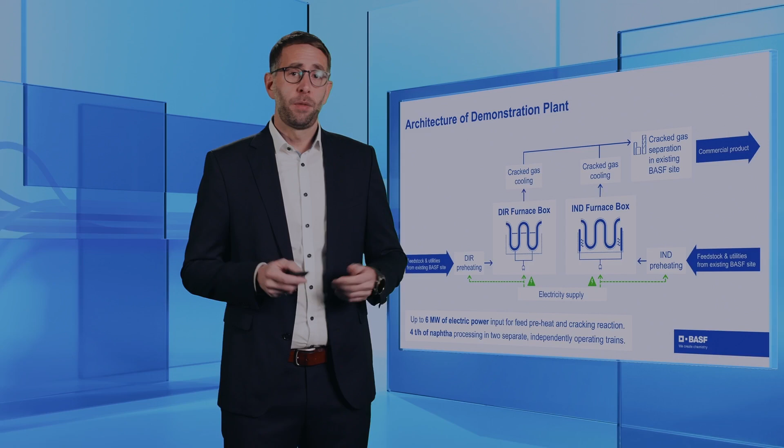Torben already gave you some information on the plant, on the layout, and on the two different heating concepts, and I will now go on with the architecture of our demonstration plant. The heart of the demonstration plant are the two furnace boxes for the direct and the indirect heating technology. Both concepts are equipped with electrical preheating for the steam and for pre- and mixed feed superheating. Both technologies are equipped with crack gas cooling as well.

As Torben already said, the demonstration plant is fully integrated into one of our steam crackers at the Ludwigshafen site in Germany, which means that all the feedstocks and utilities are supplied by this existing cracker, and the crack gas produced within the e-furnace technology is led to the crack gas separation in an existing cracker, producing high-value chemicals, commercial products with a reduced carbon footprint. Even if we do not have a fully heat integrated state here, we see carbon savings on scope 1 in the range of 90%.

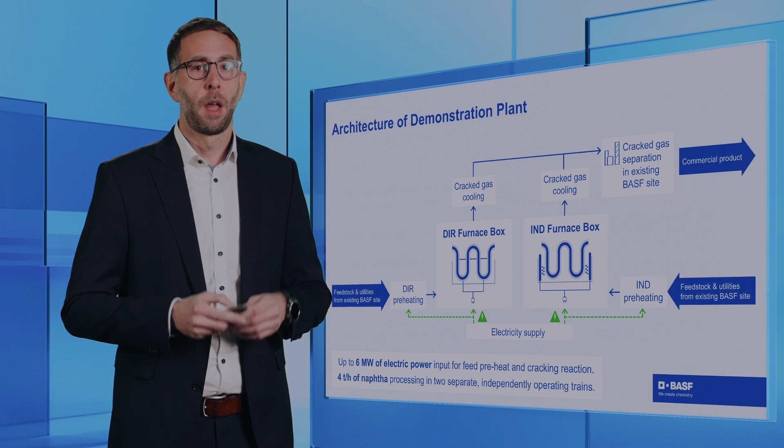In total, the concept is heated with 6 megawatts of electrical power for the preheat and cracking reaction for both furnaces, and in total we are processing 4 tons of naphtha an hour in the two separate, independently operating trains. I will now come to the operating performance of that system.

We kept the process conditions close to conventional fired furnaces. This is mainly due to the feed that we use here. We utilize a full range naphtha, so the cracking reactions are well described and the parameter range is quite known. So we are operating close to those conditions.

So far, we had both heating systems in stable operation, and we were able to produce several thousand hours of incident-free cracking operation, and we produced a few thousand tons of high-value product with a reduced product carbon footprint, as I said, in the range of 90% already for the demonstration plant.

The crack gas composition that we have achieved so far from both technologies is totally in line with the design specifications. You see an example on the right-hand side for lump components for a full range naphtha that was utilized. You see some small differences, which are an effect of the slight difference in operating parameters for those two cases, but in general we see similar results for both technologies.

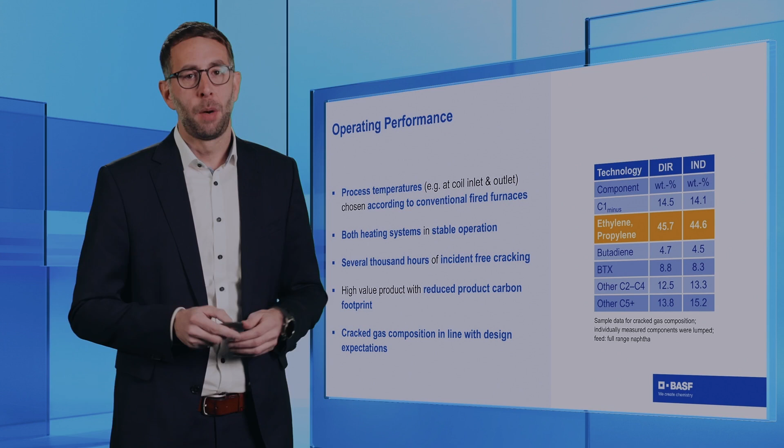Key features of the e-furnace demonstration plant so far are that we really see a stable and accurate heat and temperature control for both furnace systems, which means we have a homogeneous heat distribution with no hotspots, neither on the direct heating coils nor on the indirect heating elements.

Further, we have the possibility of a fully remote rapid furnace heat up and feed in, which means that starting the coil heating and putting the feed into the system is entirely possible from the control room, and no field operator action is required for those tasks.

We see that the system reacts quite robust and safe in case of trip situations. At the beginning we had some minor trip situations, mainly caused by instrumentation errors, but we see that we have a really robust system that could be brought back to operation by the operators quite fast, even though it's a brand new technology, so to say.

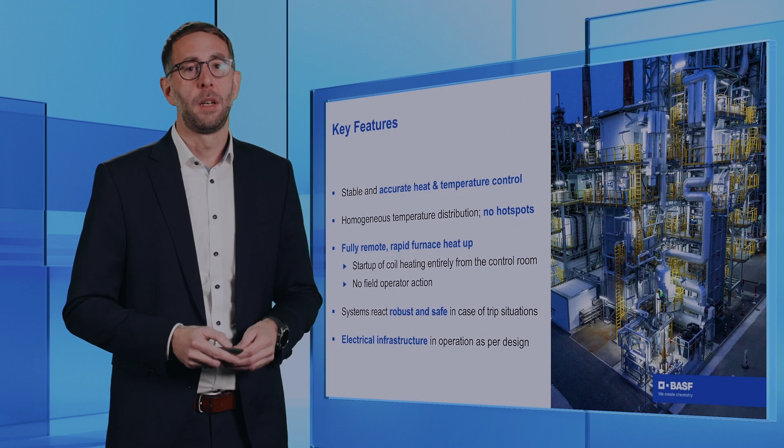The electrical heating infrastructure, which means the electrical switchgear, the transformers, the thyristors, everything required to power the system up, is in operation as per design. We will now have a look at the specific characteristics, starting with the direct electrical heating technology.

We see here a very uniform heat input into the cracking coils with a homogeneous heat flux into the process. Those conditions are really beneficial for optimized yield and reduced coking in long-term operation. We see very even heat distribution, so the temperature differences between corresponding coil segments of our multiple coil arrangement within this plant are in the range of plus minus 0.5%.

We see that operating parameter variations can be implemented very fast due to the low thermal mass or inertia of this direct electrical heating system. In the graph, for example, you see a comparison of the tube metal temperature of corresponding coil segments.

In the upper part, there is the temperature of this coil segment, the min and max values, and you see they're quite close together. We even did a step test there, and even there it stays quite compact. This is a duration of approximately 10 days that is displayed here.

In the lower picture, you see the normalized values, and there you can see that even in those transitional phases, the system reacts quite smoothly and the values are kept quite constant.

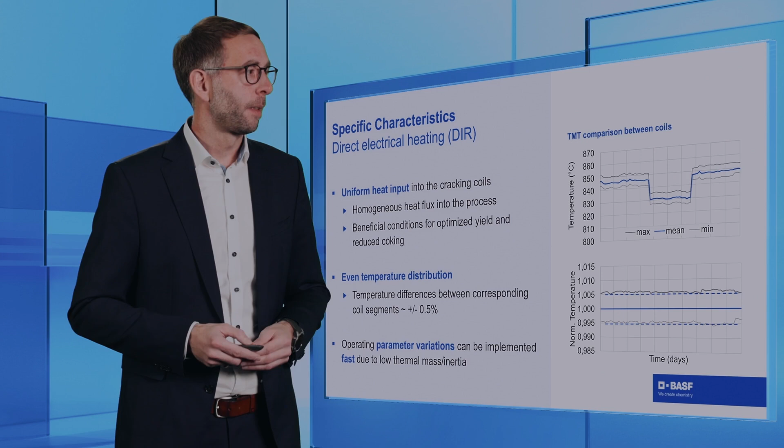I will now go on with the indirect electrical heating technology. So here we can definitely state that the performance of the heating elements totally meets the design specifications in terms of heating element temperature and power consumption. And here we have a very even power distribution of the heating modules over the full height of the furnace.

And we see that variation in power consumption between the different heating zones is maximum in a range of plus minus 2%. And this even power distribution also results in homogeneous temperature profiles on the coils, which are again likely beneficial for optimized yield and longer run times of such a furnace system.

On the right-hand side, you see here the power consumption for the heating zones. Again, the min, max, and mean value; you see there are some fluctuations in it, but if you look at the normalized power, you see this is working quite constant, and the fluctuations are more or less due to surrounding effects, and there might be some optimization potential by further trimming the PID parameters of the whole system. But if that's the only case that is required for that new technology, then we are quite lucky to have that in that way.

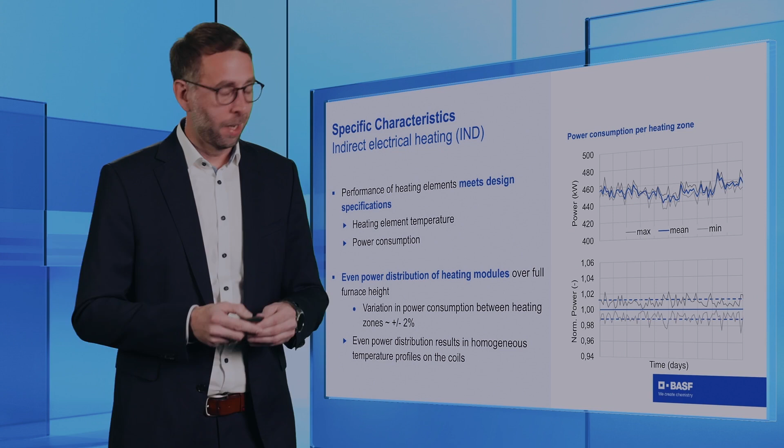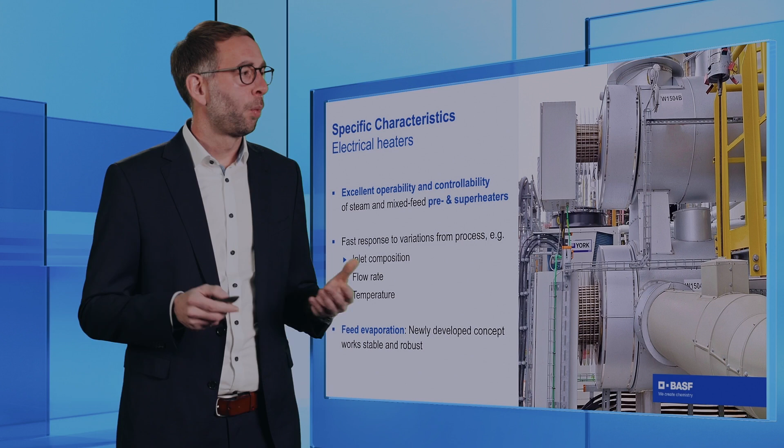Other electrical heaters that are implemented are the mixed and steam pre- and superheaters for the feedstock. And we can also state here that we have excellent operability and controllability of those different heaters that are arranged in the plant. And we have quite a fast response to variations from the process in terms of temperature changes, flow rate changes, or the inlet composition. And for the e-furnace demonstration plant, there is a totally new developed concept in place for the feed evaporation. And we can also state that this is working quite stable and robust.

So far, we have done some variation of operating parameters, which is mainly tuning of the heat flux profile for the direct and indirect heating technologies. So both technologies offer possibilities to trim the heat fluxes, maybe in a range that is a little bit larger compared to conventional fired technologies. And currently under investigation, there's a lot to investigate with such a new technology, but for example, the coil inlet and outlet temperature, feedstock composition, steam to hydrocarbon ratio, and the cracking severity, which is mainly done by varying residence times and the coil outlet temperature.

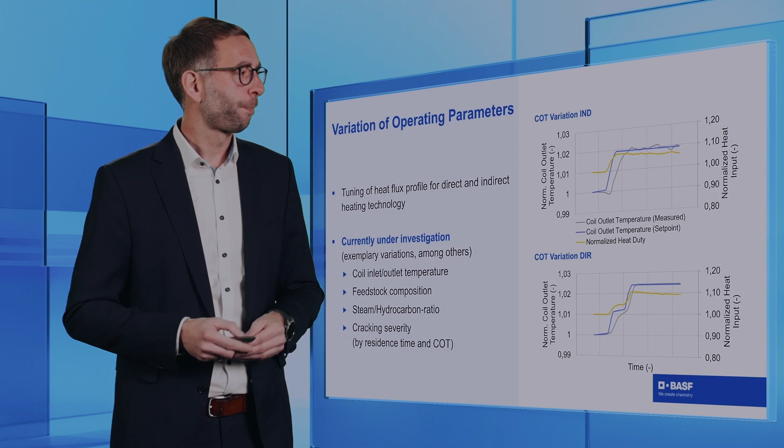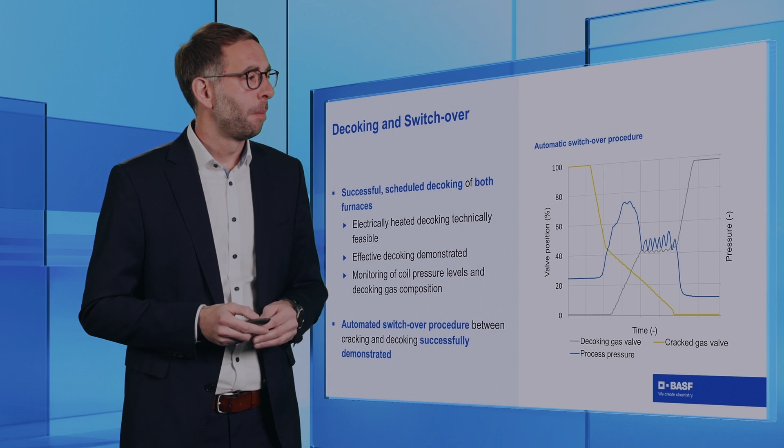And then we have an automated switchover procedure in place between the cracking and the decoking and vice versa, which was successfully demonstrated as well. And on the graph on the right-hand side, you see this automated switchover procedure. So the yellow line is the cracked gas valve that is closing, the decoking gas valve simultaneously opens in a certain manner, and then you see the transition and pressure level with a little bit of fluctuations in there, which might be further minimized by controller optimization.

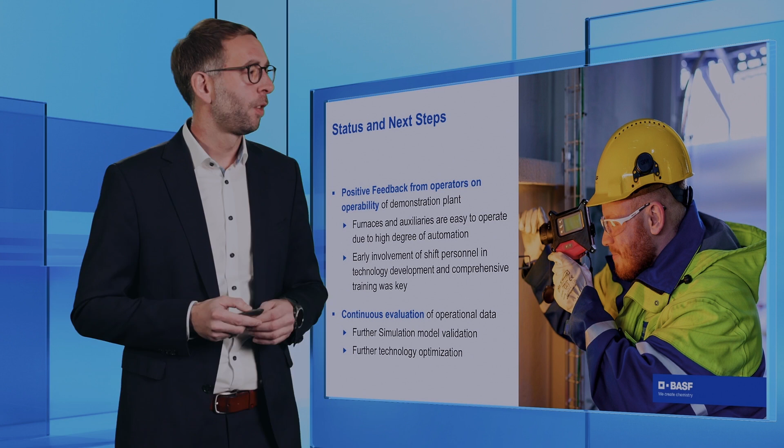And what is an ongoing task is the continuous evaluation of all the operational data that we are gaining from our demonstration plant. That's the main purpose here, to further validate our simulation and models and to further optimize the technology.